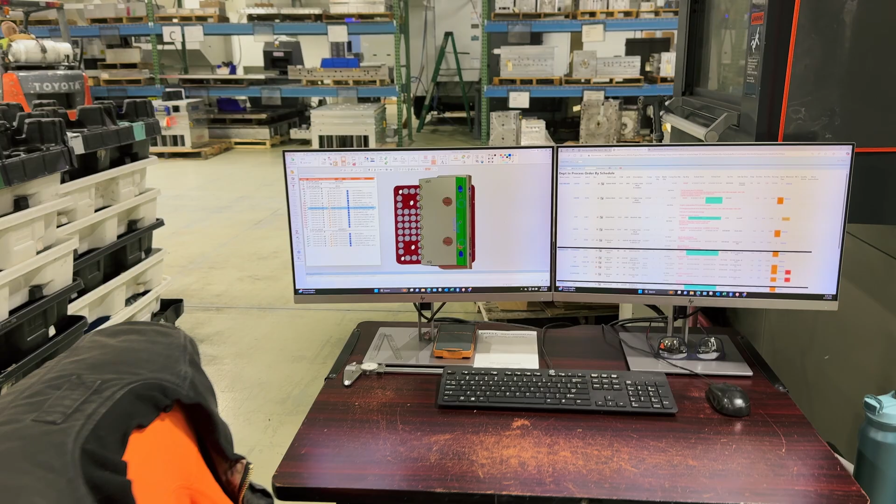A few years ago, Quest took on a challenge to integrate all of our systems into one workflow and try to go paperless. This was an overwhelming challenge and something unique for a manufacturing company of our size. Here's the story of how we did it.

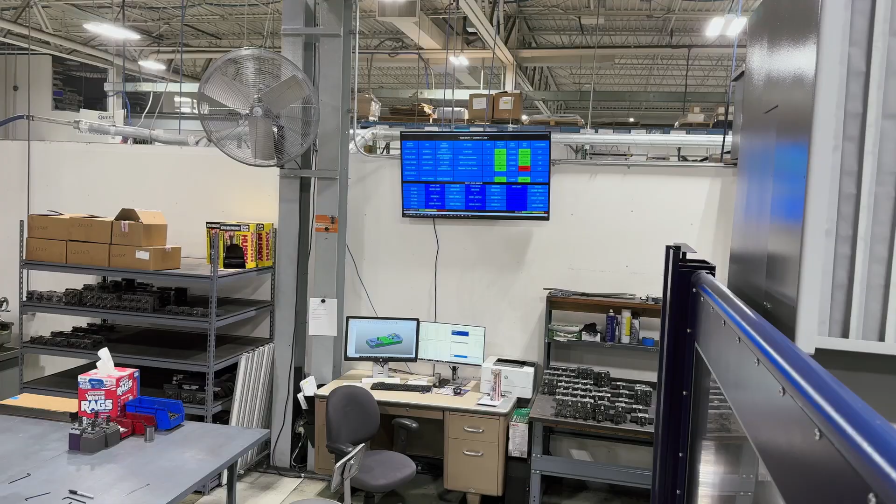As years went by, we began integrating into JobBoss more, adding work centers to use for quoting, creating job travelers, and more. But this was just scratching the surface of our ERP integration. It was a lot of manual data entry and still required a lot of one-on-one program manager interaction with the shop floor to ensure that jobs ran as intended.

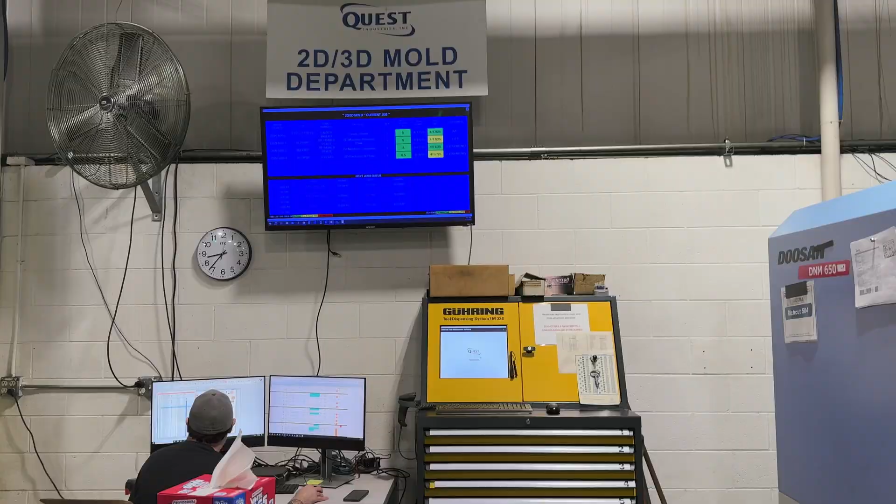At this time, our program managers could only handle about 2 to 4 jobs at a time. Any more was overwhelming for them. We needed to make a decision: should we hire more program managers and add overhead?

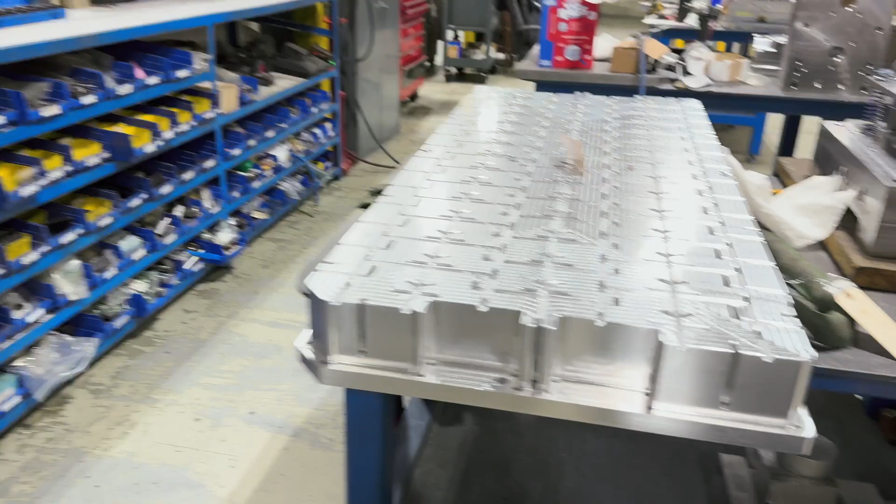Or do we choose to fully integrate our current ERP system, which would include scheduling of jobs, quality workflows, purchasing workflows, and more? This took us down a long path of having to relearn and rewrite our internal processes, relearn our ERP and understand what it could and couldn't do to ensure it was utilized to the fullest.

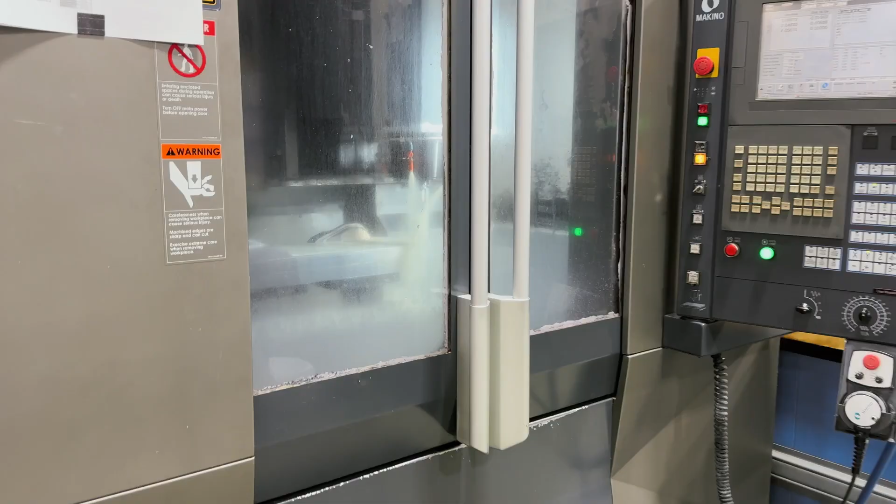Once completed, we then needed to automate. We realized ERP is great on its own and for whoever is actively using it, but we couldn't expect the shop floor to have all ERP access as if they were in the front. So we needed to think outside the box.

We hired a consultant from California to custom write code which looks into JobBoss and extracts out data and presents it in a web-based format for all to see.

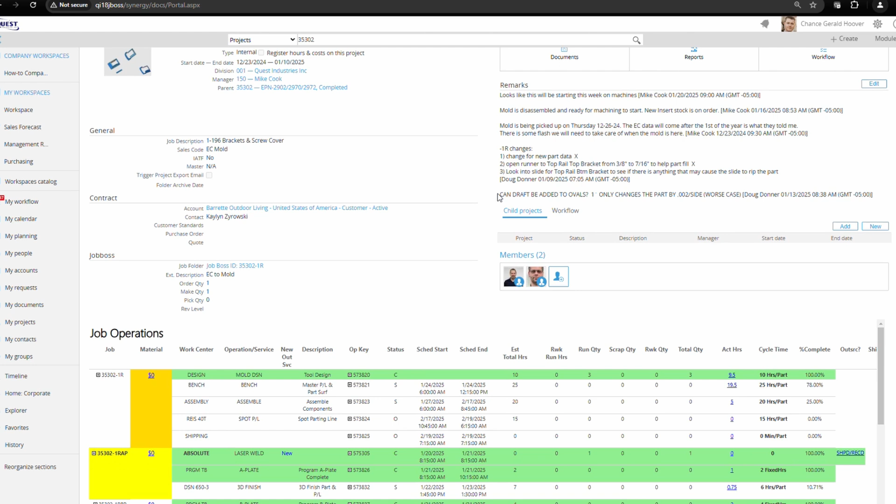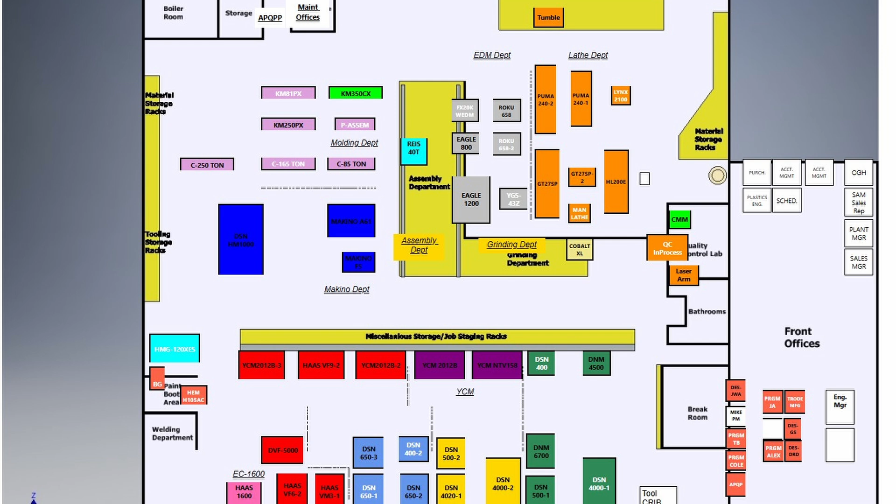This allowed custom reports, notes, scheduling information, and more to be extracted. This also allowed for custom workflows, lessons learned, shipment notifications, department by job efficiency tracking, job cost summaries, the list goes on and on. Basically, if we could dream it and the data was available, we could get it extracted into any usable format inside of Synergy.

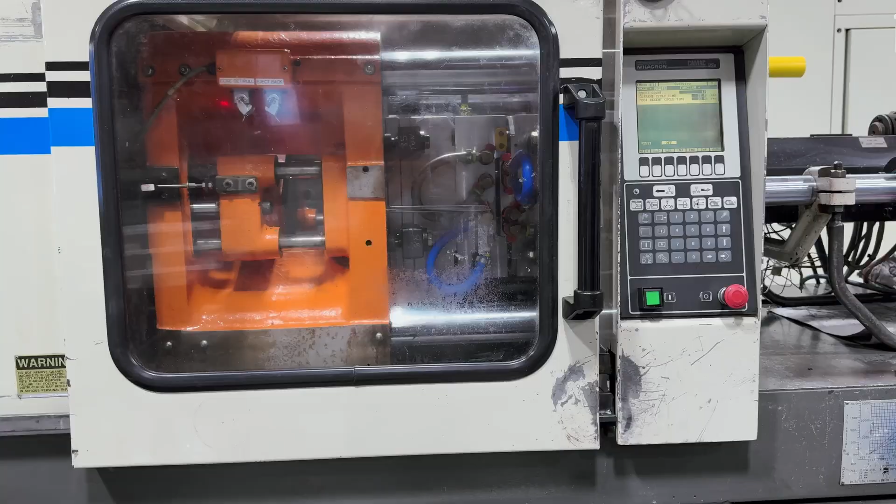The transition to Synergy and electronic workflows was not an easy one. When employees are used to paper travelers and program managers telling them what to do next, where the job should go next, versus going to a computer to get all their information electronically, it was a tough transition.

It took over a year to integrate fully, but once we got the buy-in from the employees, they immediately realized how much more efficient it is, and it was an immediate success.

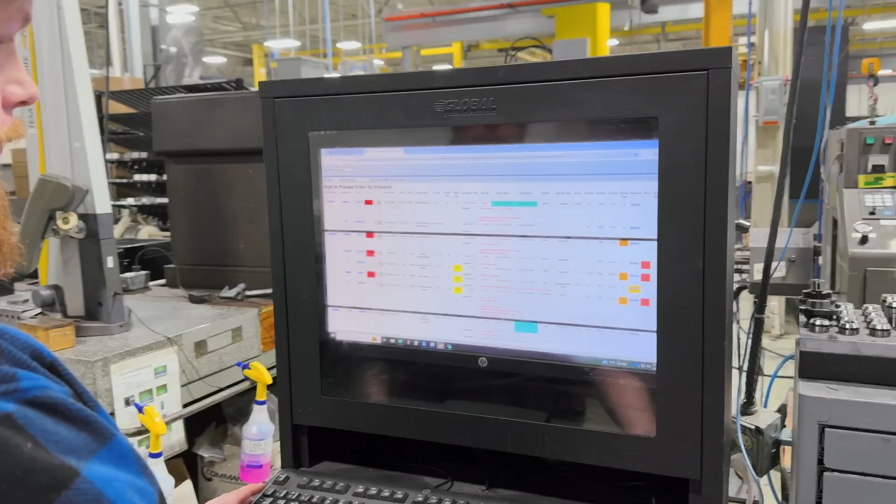This allowed for Quest to become completely paperless. We all had so much information at our fingertips. Our customers loved it and business began to grow.

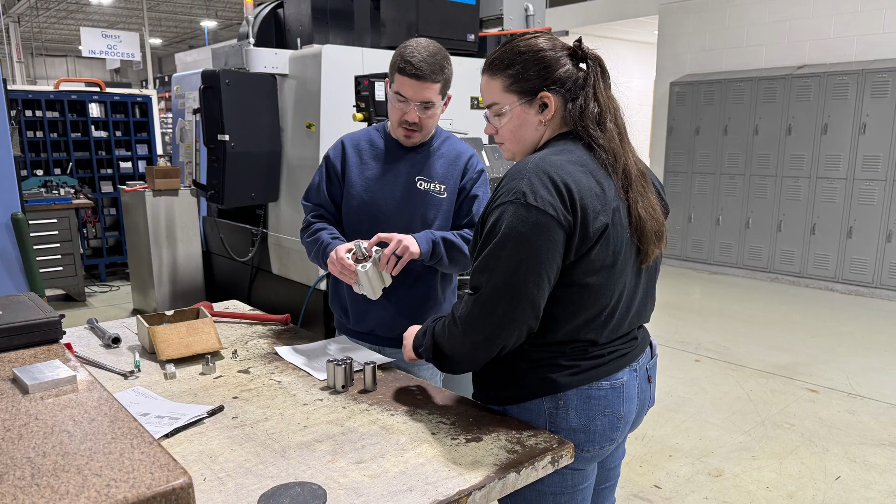Our PMs that used to only be able to handle 3 to 4 jobs at a time can now handle 15 plus jobs at once. Synergy integration inadvertently encouraged teamwork.

With customized workflows, there is no more carrying a paper traveler from work center to work center. No more wondering if something was ordered or received. If someone doesn't log time correctly, it's automatically shown to you each day automatically.

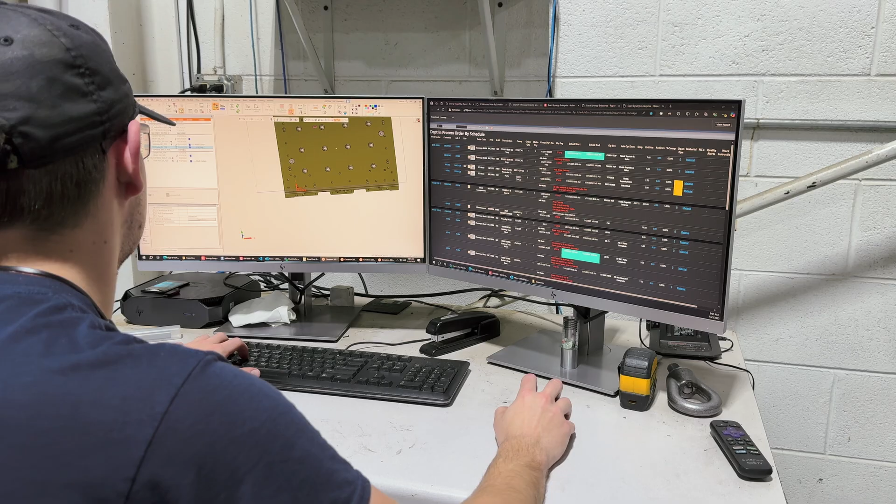The list goes on. To integrate JobBoss and Synergy, it was a very long, hard, and costly road. It has been over 6 years now, and we have never looked back.

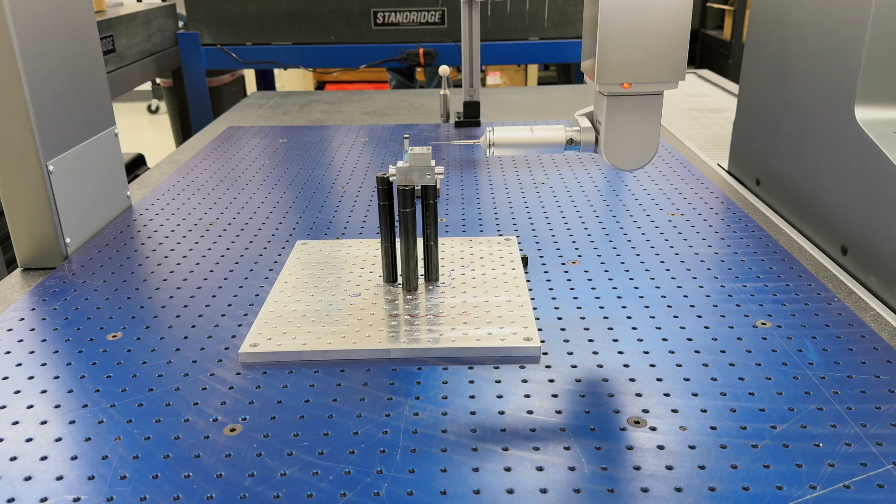Power of customization is priceless for a company of our size. This is our best kept secret in how we can handle 300 plus molds a year and millions of dollars in detail machining and molding, all in our Lapeer facility with only 65 employees.

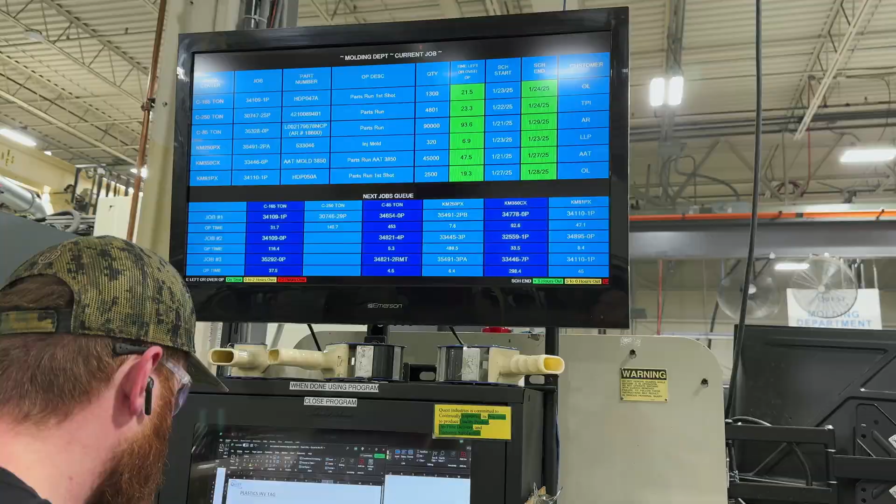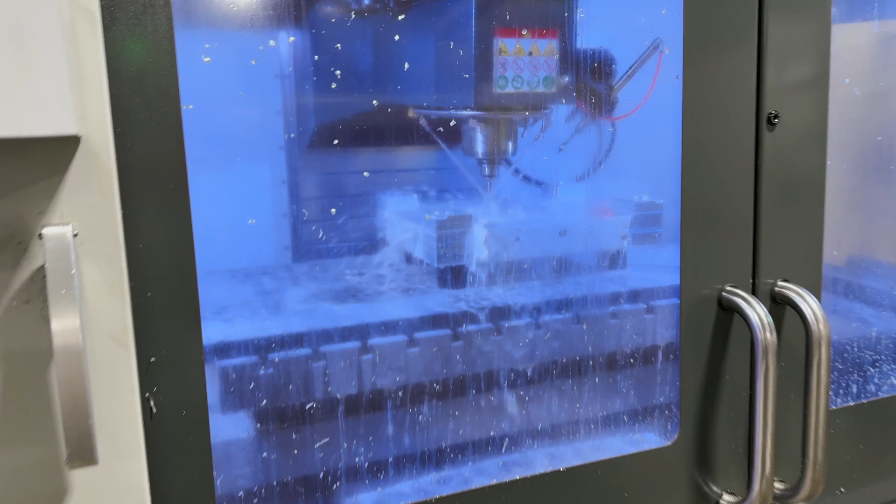Looking back on it, we have no idea how we ever operated prior to Synergy and completely electronic workflows. It took a lot of time and money to invest to get this to where it is now, but we'll never look back. We built the foundation, and in the future, we're going to continue to expand on what we currently have, continue to automate, and to continue to try to make all of our workflows as seamless as possible.